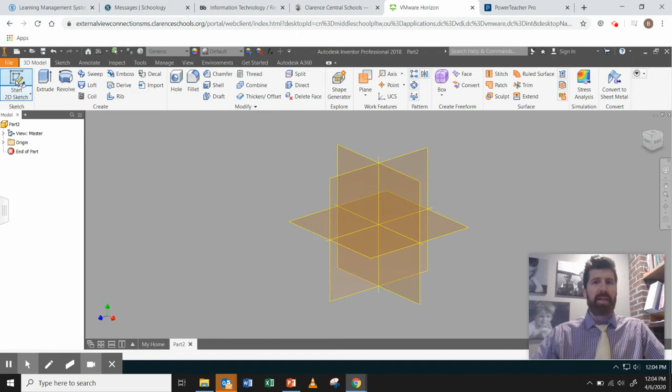This is the introductory screen to Inventor, or this is what it opens to. I'm going to select new part, and pick a part. Once I've selected a part, now you can see up here, I'm in this 3D model tab just briefly. I'm going to start by making a two-dimensional sketch, so that brings up these sketch planes. Since I'm going to be drawing the robot keychain head from the front view, I'm going to select the XY plane. I click on that, and it brings up this.

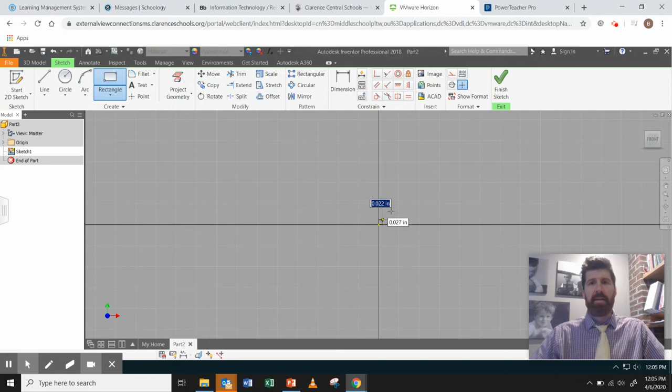Now you can see over here, the sketch tab is selected, so now I have access to this ribbon of sketching tools. I'm going to start by drawing a rectangle because the robot keychain head is rectangular. So I left click once, then drag the mouse over, and click again. Now, if I hold down the wheel on the mouse, that lets me pan my view over like this.

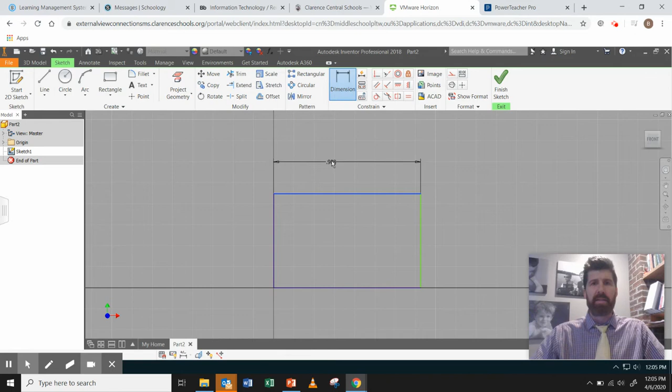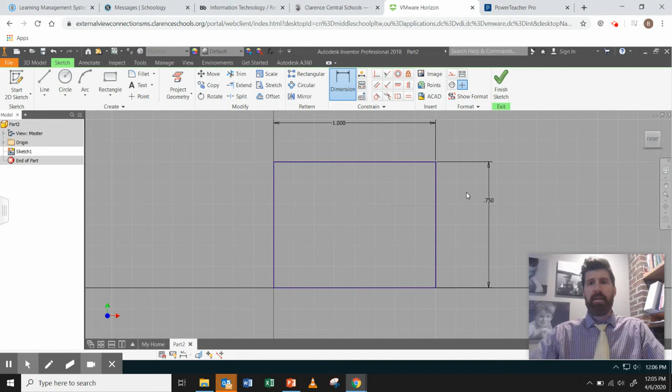Now I'm going to enter some dimensions using the dimension tool. I'm going to select this line, and I can type in 1, enter. That lets me set the width of this rectangle to 1 inch, which is the width of the robot keychain head. I'm going to select this line and set that to 0.75, which is the height of the robot keychain head. So now I have the front view drawn.

So I finished the sketch. You can see when I finished the sketch, it took me from the sketch tab or the sketch ribbon over to the 3D modeling ribbon, because now it's going to let me take this two-dimensional sketch and turn it into the three-dimensional object. To do that, I'm going to use the extrude tool.

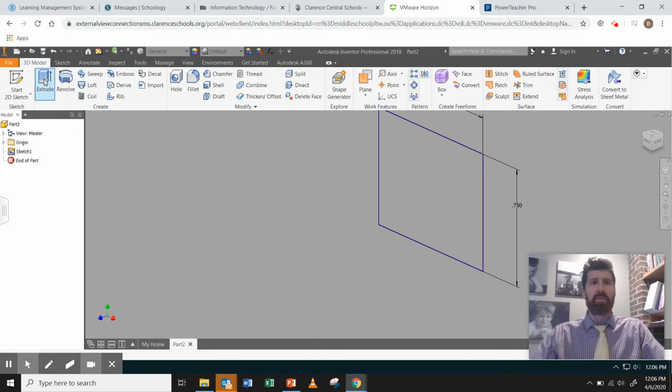Extrude gives some depth to our two-dimensional drawing. So instead of extruding this 1 inch like it's defaulted to, I'm going to change it to 0.75 because our robot keychain head is only 3/4 of an inch deep. Okay, so now I have the robot keychain head.

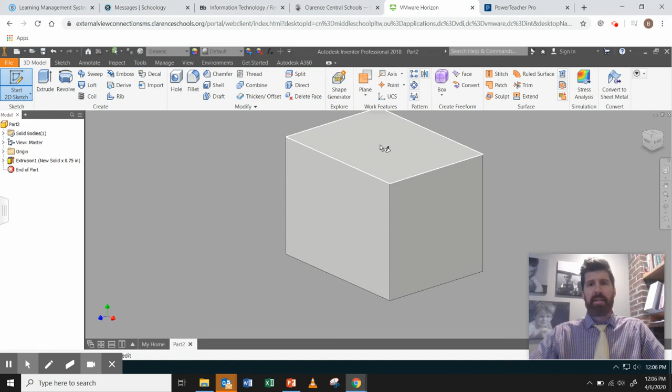The difference is I need to add a hole to the robot keychain head. So I'm going to do that by sketching on this top surface, because that's where the hole is going to go. This is the front edge over here, and this is the back edge, and the hole needs to go closer to the back. So I'm going to make a point, just like if I was going to drill a hole in real life, I would start by marking a center point on my robot keychain head.

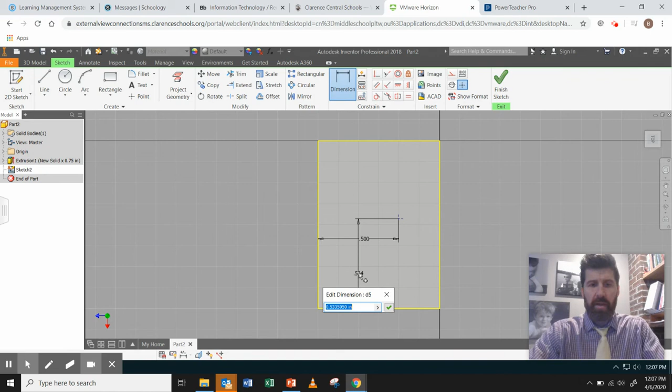So I clicked somewhere near where the hole is going to go, and now I'm going to add some dimensions. The dimension from the front of the head to the hole should be a 1/2 inch, 0.5, enter. And from the side, the distance should be a 1/2 inch. So from the center point to the side of the robot keychain head, that distance should also be 0.5. Now I have this center point located where it's supposed to be.

I'm going to finish the sketch. Now it takes me back to the 3D modeling tab, and I have access to the modeling tool called hole. If I select that, there's only one center point on this part right now, so it automatically selects that center point. For the robot keychain head, I just need to modify the size a little bit. It's still going to be a through hole, like you can see here, the termination goes all the way through.

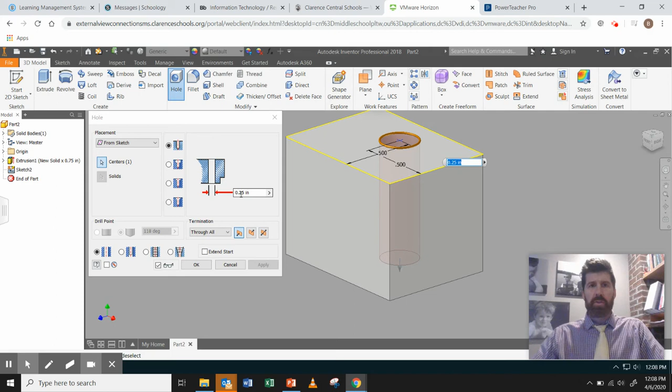But instead of being a 1/4 inch diameter, the robot keychain head hole is only 3/16. So you can either type in 3/16 like that, or if you know the decimal equivalent, you can type that in. Okay, so now I have the robot keychain head finished.

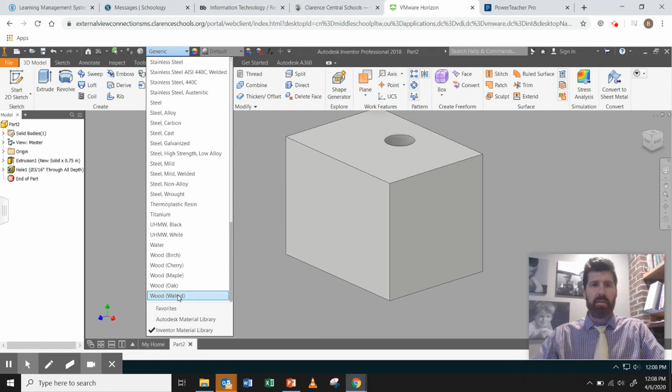The last thing I can do if I want is change this part from being just a generic material like this. I can select and change it to, let's change it to maple just for fun. And now I have that.

So the last thing I'm going to do is save my work. I go to the save icon. And when I save it, I'm going to save it in my H space. In my H space, I would save it in my Tech 6 folder. Oh look at that, my Tech 6 folder is my Tech 6 is awesome, Tech class is awesome. So I'd save it in here.

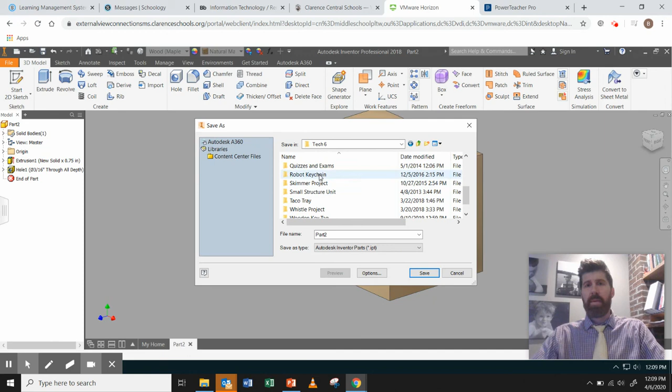And I already have a Robot Keychain folder. I'll save in this anyways, and I already have a head saved. So I'm going to save this thing as demo head. And now when I save it, automatically down here on the bottom, it went from being called part 2 to demo head. And now I have my part saved. This ends the video.